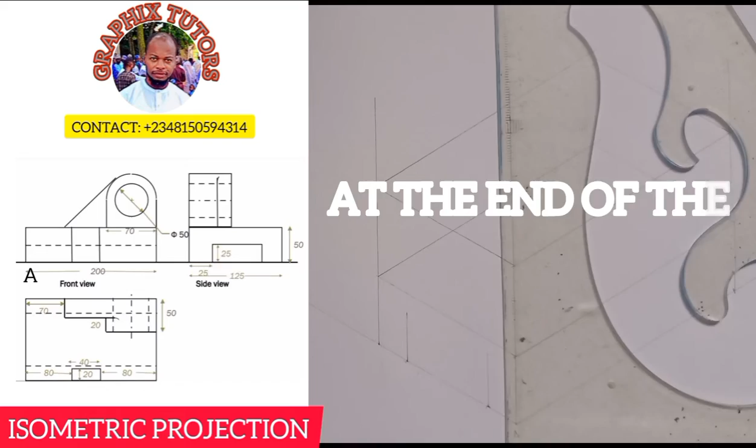If you look at the left hand side of the screen, you will see a question: the orthographic view of a given figure. This view is in first angle projection. This is the front elevation, this is the plan, and this is the end view. So we are to assemble them in isometric projection. But if you look at the dimensioning, it is very large, so I would like to reduce the dimension in a ratio of 1:2, that is half full size.

So I'll use half of every dimension I have. If I have 200, I'll be using 100. If I have 70, I'll be using 35. I'll go together, so let's start.

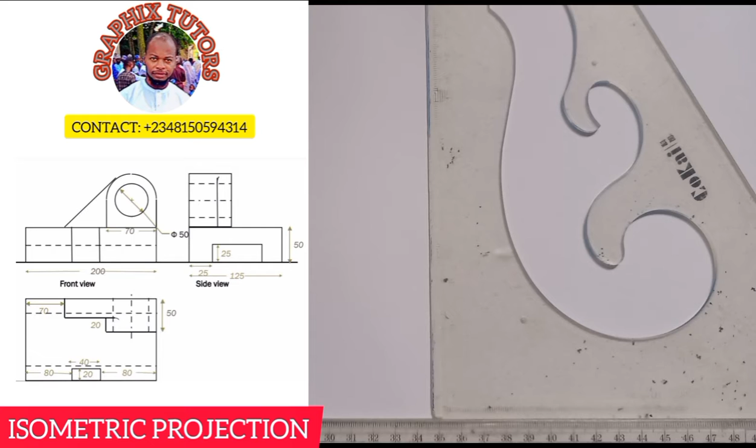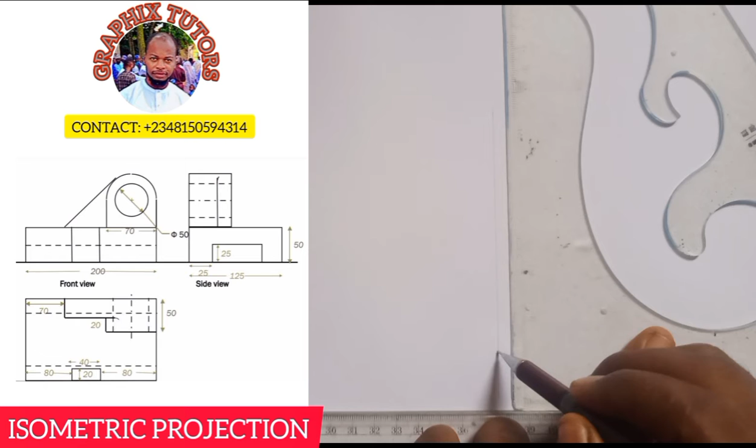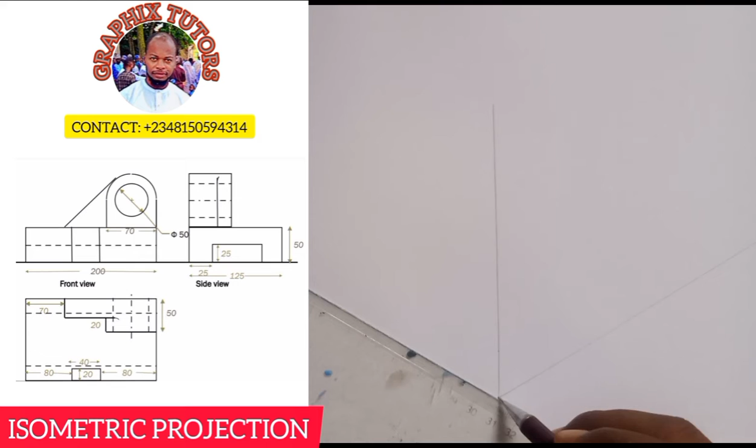Now when you hear the word isometric projection, the first thing you have to do is draw your isometric axis. You draw your vertical line this way, and make it more visible so we can have a clearer view of it. We'll have the vertical line this way, and we have the horizontal line also this way. And we also have the other line here too, can you see that?

The fact that the diagram is facing this direction, look at the elevation. So this part you see here, let's say it is point A, meaning that point A will be somewhere around here. So we're measuring in this manner.

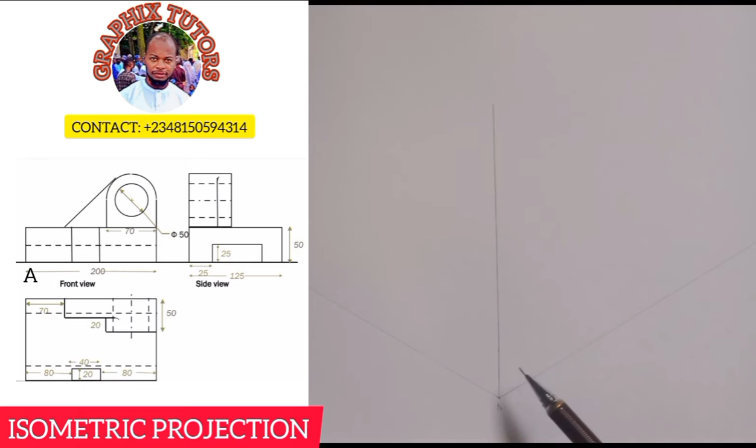So we see that from here I'll measure 200, but because I'm using half full size, I'll measure half of 200, which is 100. So let's measure that of 100 here and see. So if I place it here, so from 0, can you see that, 100. This is where it ends.

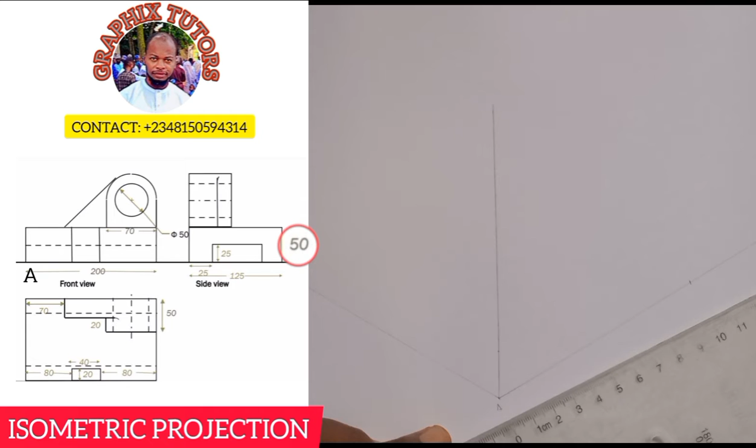While the other side, the height? Since from here to here, from the end view, is 50, and in the front elevation, nothing is given there. But look at the length of this circular figure here, this semicircular figure is 70. It means that the height also is 70. So 70 plus 50 will give us 120, so I'm going to measure half of 120, which is 60.

So I'm going to show 60 here. So from 0 to 60. That is half of 120.

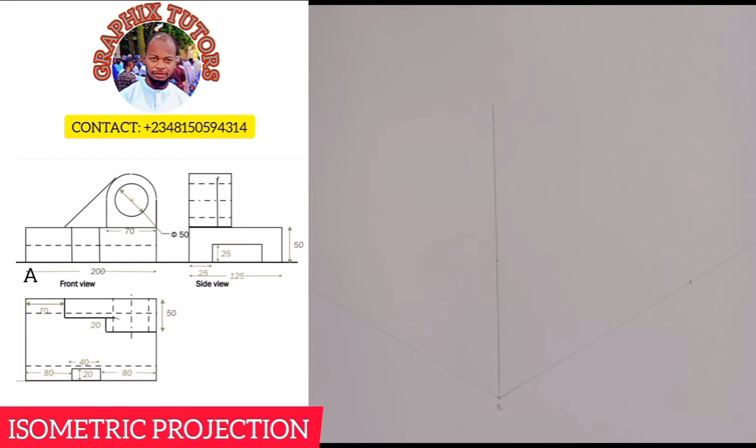And the width is given, not shown here, check from the plan, but check the length of the end elevation is the width, and that is 125. So half of 125 will give us 62.5 altogether. So I'm going to measure the width here to be 62.5. So from 0, 60, 62.5, somewhere around here.

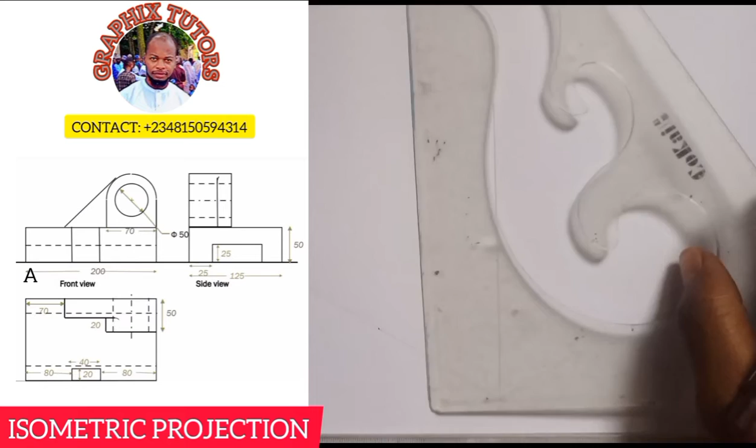And I'll now use it to form my figure this way. So from here, I'll take it up, and from here, I'll take it up, and I'll use it to form my box this way.

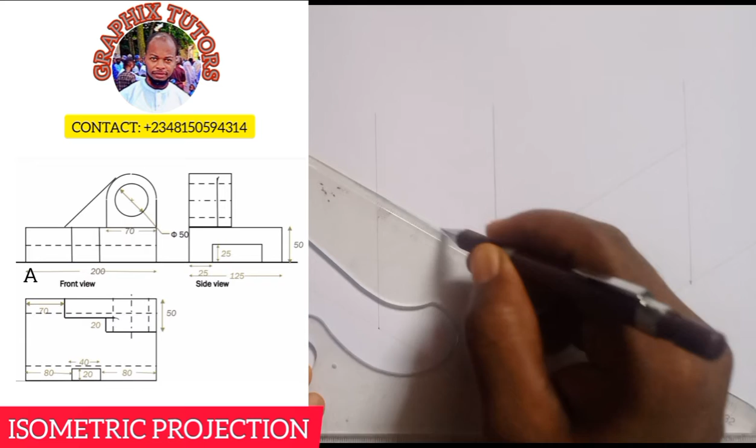Can you see that? So I brought out the shape, let me make it more visible.

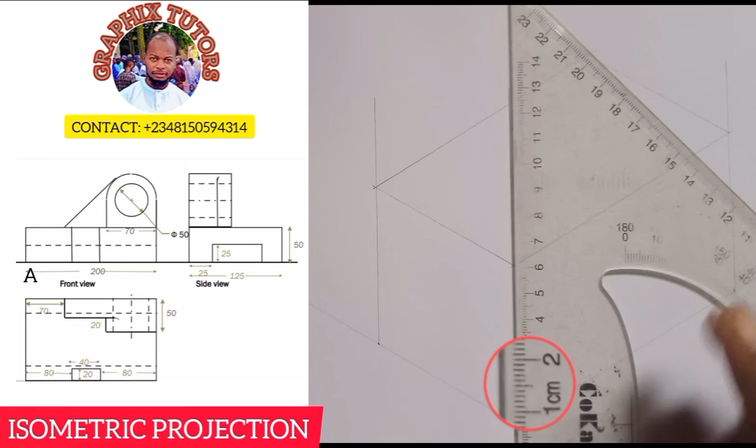So we'll proceed. Now from here, let's just measure our height of 50. First of all, we measure the height of 50, so you take half of it, which is 25. So from 0 to 25, because we're using half full size, right?

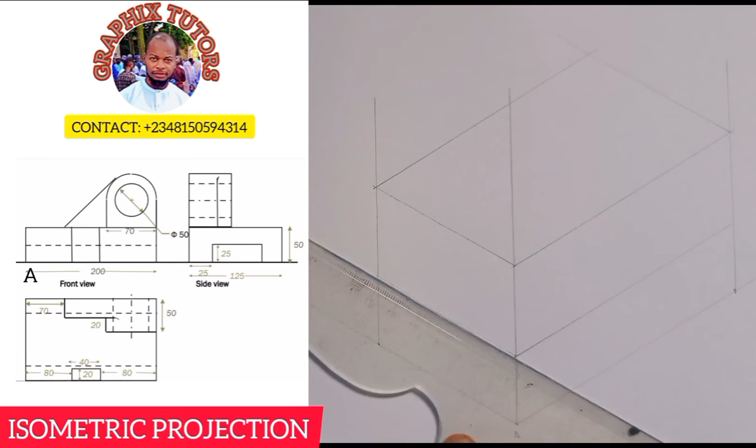Then I'm going to use it to go round and round it this way, this way, this way, and this. Hope you can see that.

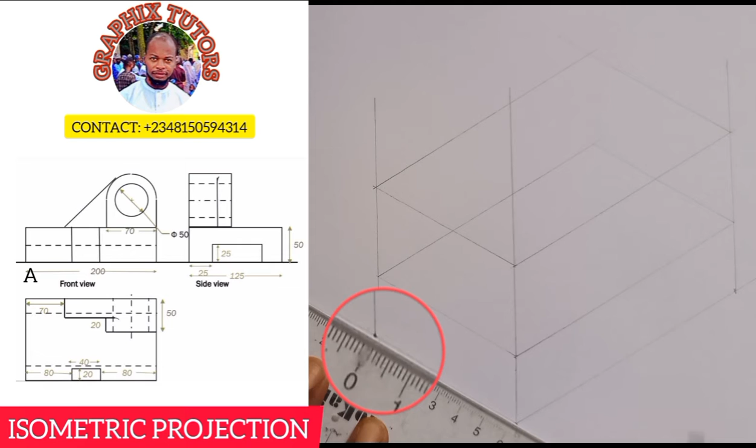That is the thickness. Then within, we have 25 here, so I'm going to measure 25 from here and from here to get that thickness there. So I'll measure 25, so from 0, half of 25 is 12.5. So 0, 10, this is 12.5 here.

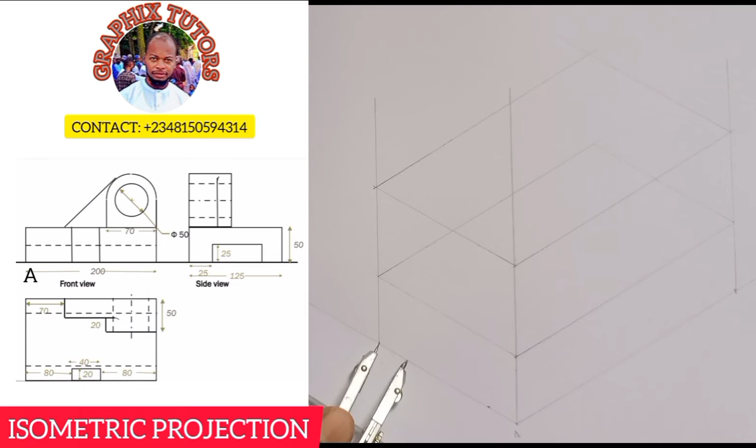I'll come here again, I'll do the same thing here: 10, 11, 12, 12.5 here. Hope you can see that, or you can just use your instrument to ensure uniformity. Hope you can see this and this too.

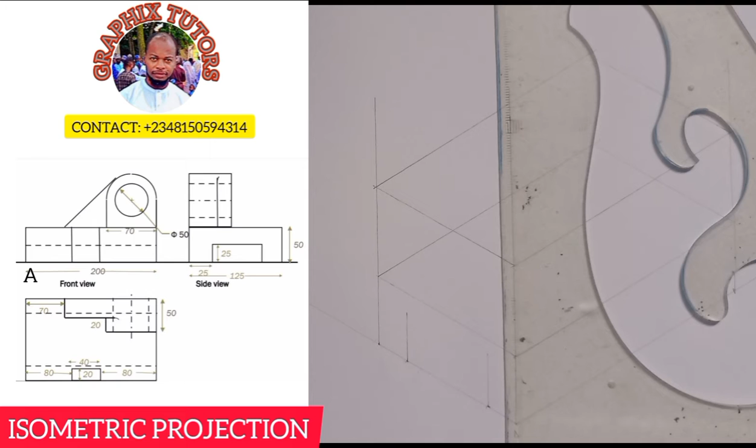And I'm going to take it up in this manner, and here too. And the height you see here is given to be also 25, the same thing. So whatever happened here, 12.5, we're using half full size, don't forget. I'll come here to measure 12.5 again, then I'm going to thicken it and close it up in this fashion.

Can you see that? I also thicken this side too, all this point to here.

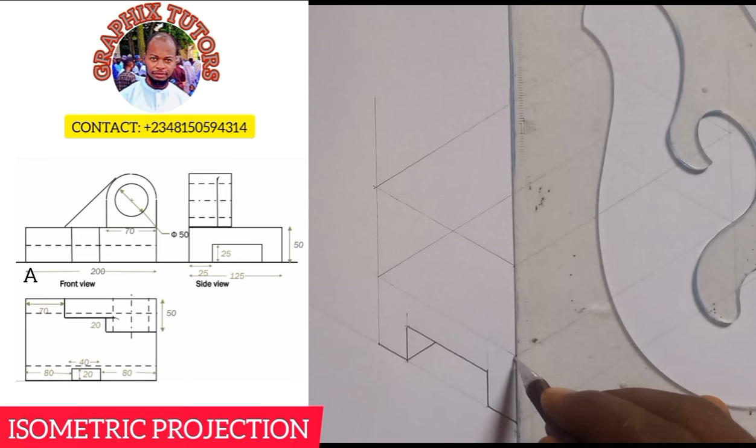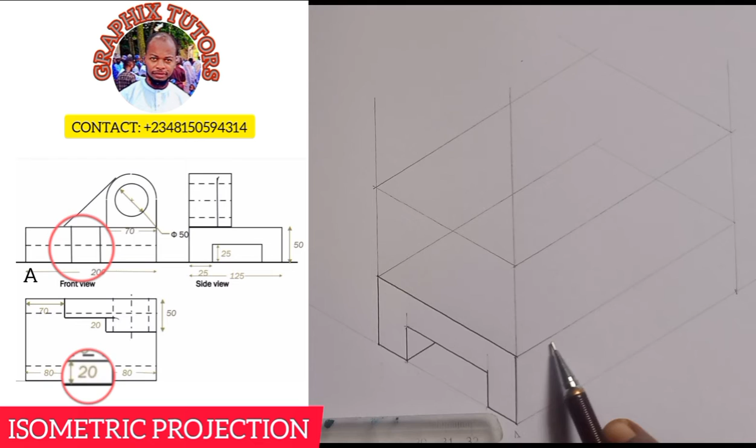Hope you can see that. To get to this point here, you're going to move a distance of 80. But because we're using half full size, we're using half of it, which is 40. So I'm going to measure 40 from this side, from 0 to 40.

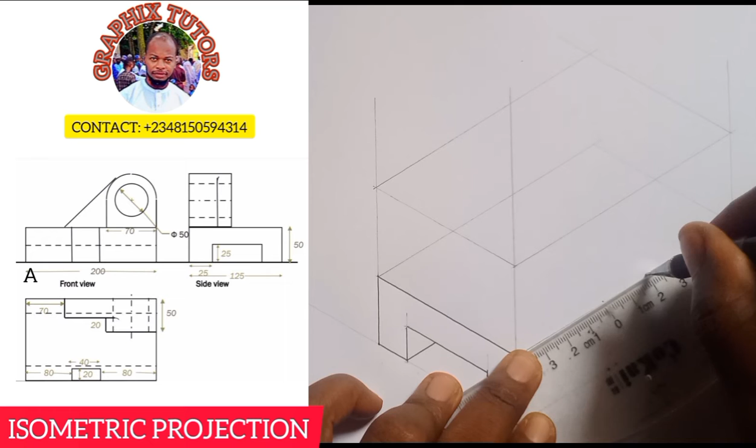Can you see that? Then measure 20 again, as in another 20. From 0 to 20.

The next thing is I'll bring it down in this fashion, and in this fashion too, so I can easily just thicken it out straight, just to save our time.

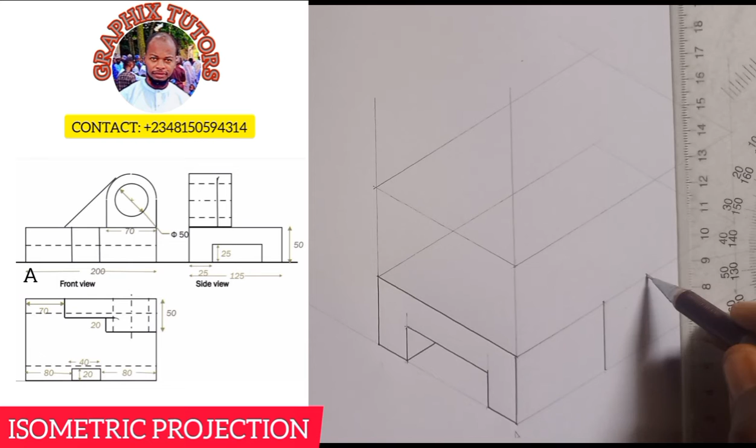Then I'll take it in by 10. Remember, half full size, so if it is 20, it will be 10. I'll take it in by 10. So let's measure the 10 out.

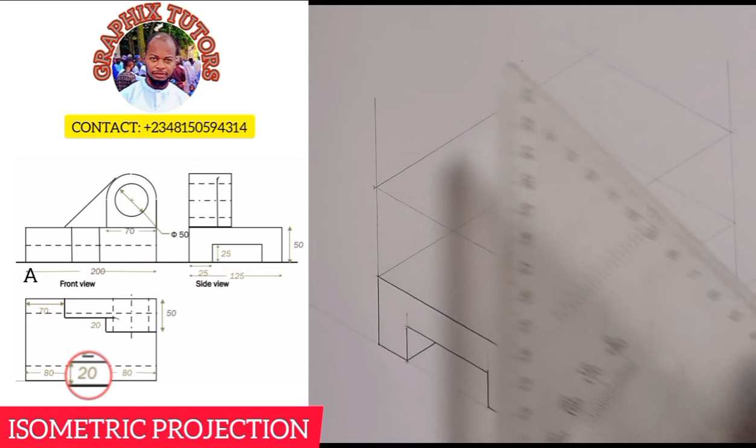From 0 to 10, so you can usually just take it out. Then close it up, and also close it up.

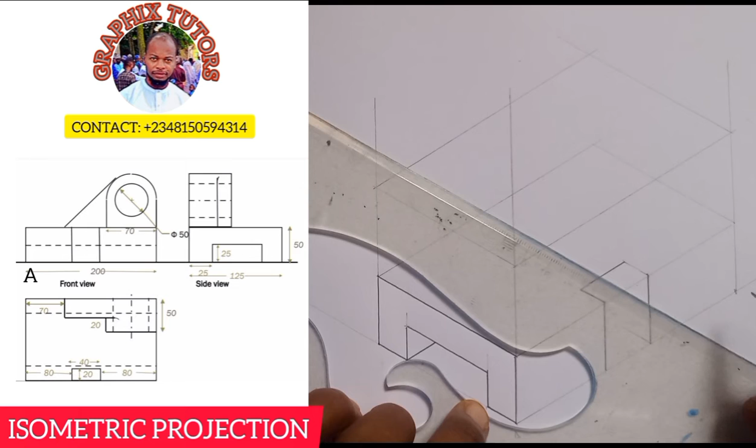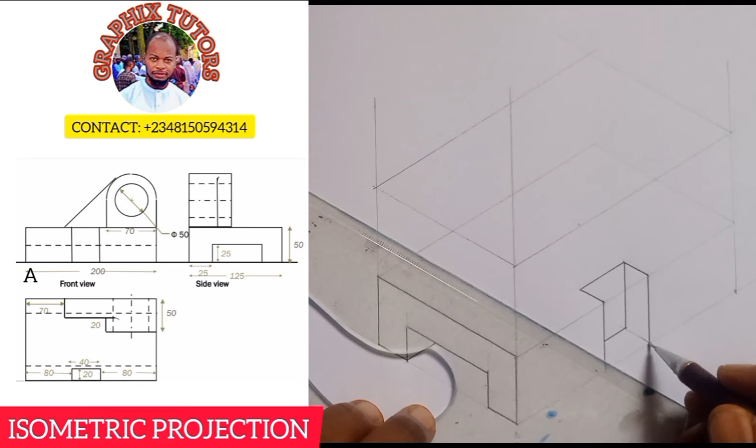Bring it down, then close it up, and here also this way. Then I can close the rest up here.

So this hidden line you're seeing, this two hidden line, looking from the top is this. So looking from the top, you cannot see these 2 points that you see this hidden line running through.

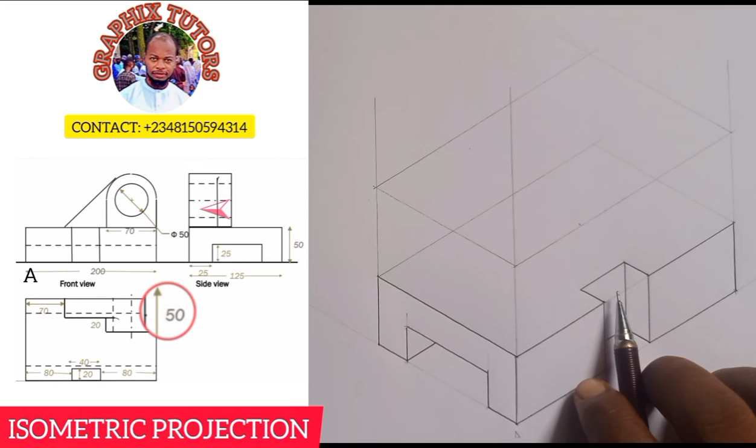Then the other one will measure 50 to get that circular figure there. So I'm going to measure 25. So measure 25 here, from 0 to 25. Here we have.

And I'll take it up this way. And I'll bring that guy out this way.

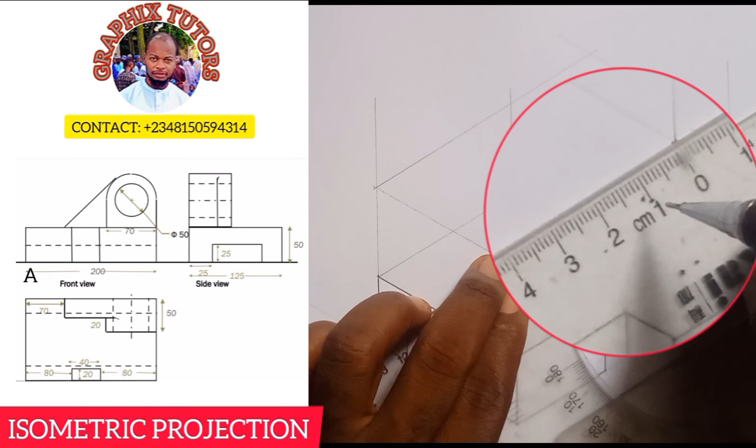Remember it's 70, so I'll measure 35. So from 0, this is 35 here.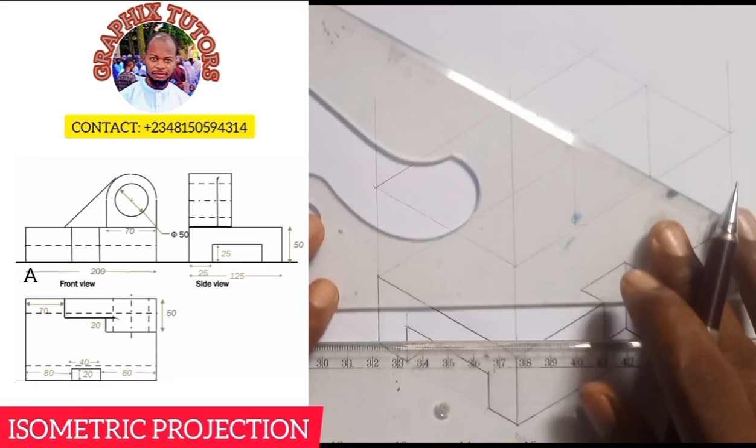So that way I'm going to draw. So I'll bring this out, and I'll take this up. And I'll close it up to this extent here, and here too.

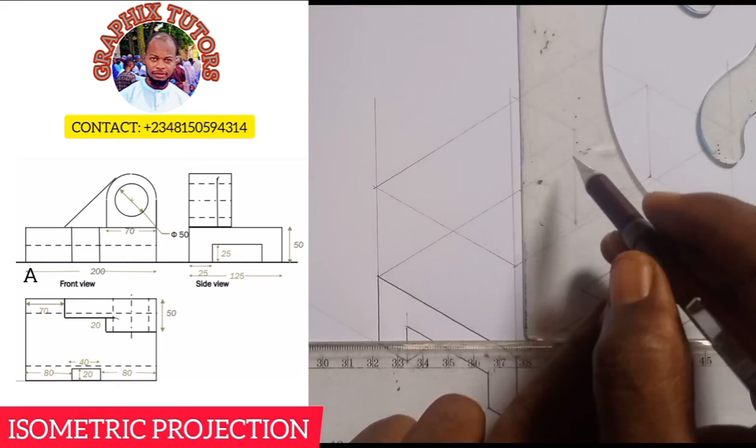Hope you can see that. Now I'm going to draw a circular figure here in 3 places. So this is the first part the circular figure will be, and this is the second part. Then the third part will be 20 millimeter away from this end here.

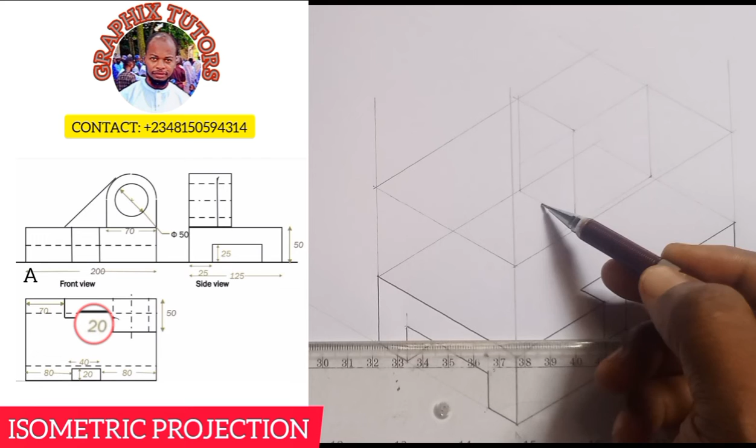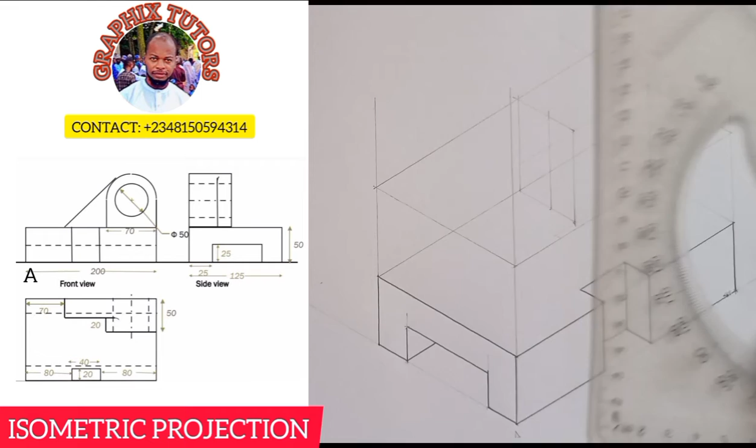So since it's 20, I'll be using 10 because we're using half full size. So I'll come here and measure 10, from 0 to 10. Then I'm going to take it up this way. And I'll close it up.

Hope you can see that. So I can now start drawing my circular figure here. So the first one is just coming in. So let's do that and see. You join the diagonals.

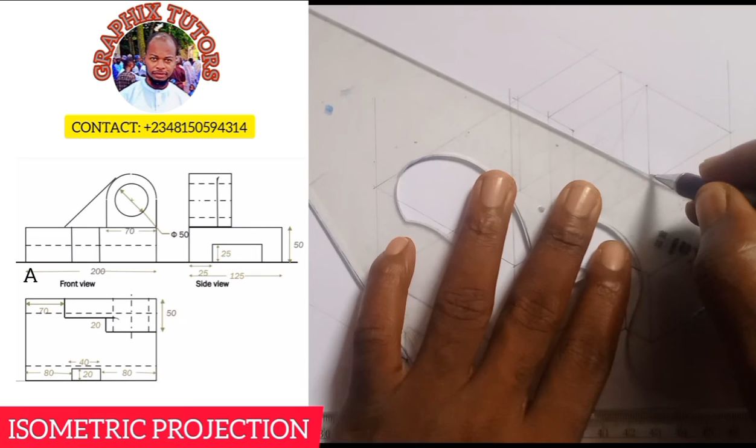So when you do that, they are meeting here. That will be the center of that figure. Then I'll bring this down, and I'll take this way.

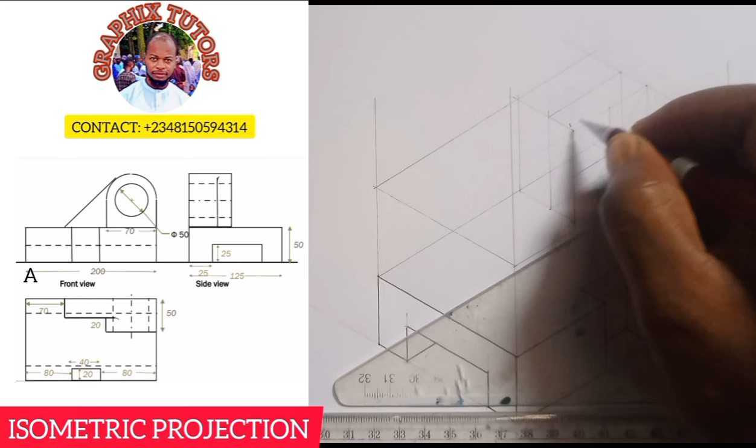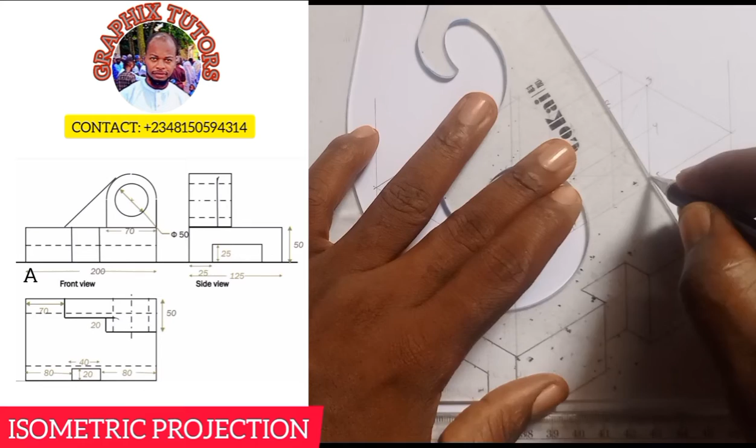So I can easily call here to be 1, 2, or 1, 2, 3, 4, 5, 6, 7, and 8. So I'll move from 5 to 8, and I'll move from 5 to 2. Can you see that? So they are meeting here, so which I'll call 9 and 10.

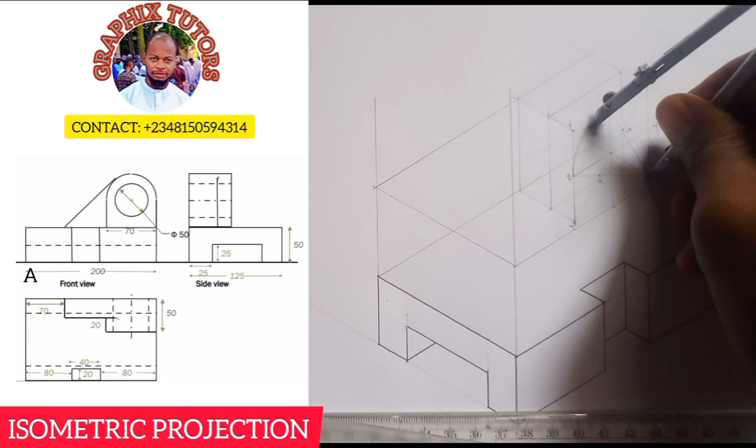Not necessarily draw this. Now, I'm going to connect from 5. Then I'll connect 8 and 2. Can you see that? Then I'll place it at 10 to connect 2 and 4.

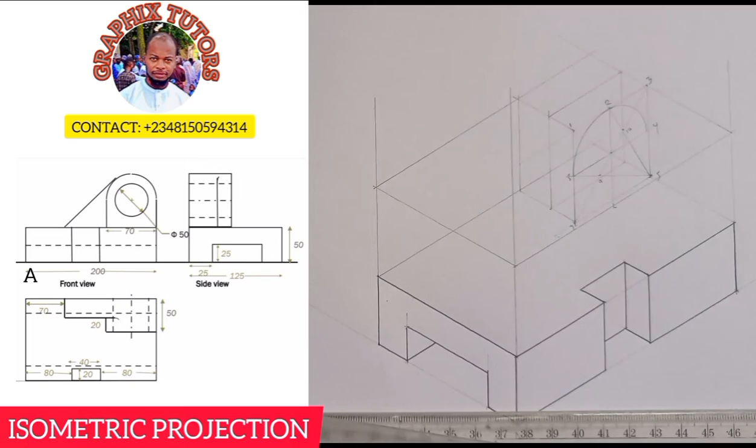Can you see that? Now the next thing I'll do is the same thing at every end here. I'll connect from this end to this end, then from this end to this end, then transfer the points.

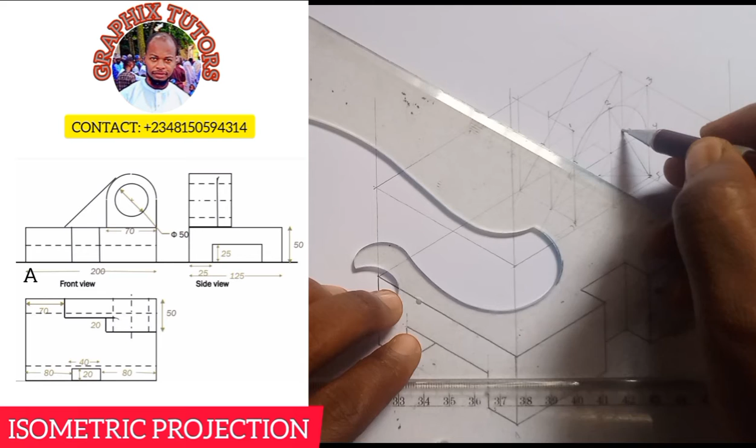If I transfer point 9, it will be at this line and also at this line. If I transfer point 10, it will be at this line and also at this line. Can you see that? Then I'm going to move these diagonals from here to touch this diagonal here.

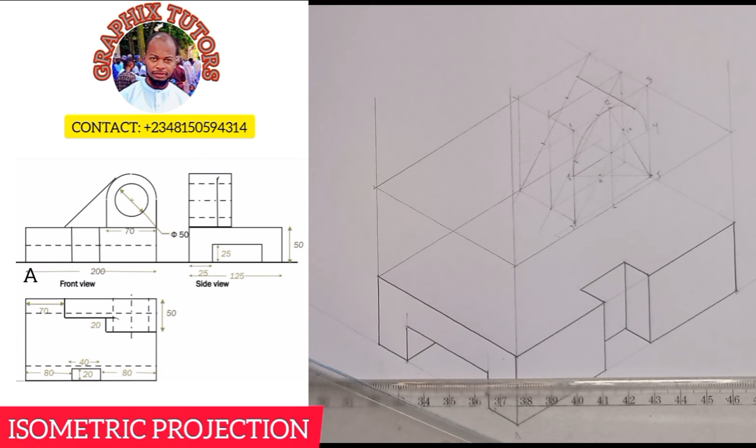Can you see that? Then I'm going to move this from here and connect this to this part here.

Then I'll place it at this end to connect this to this part here, using the front line first. Can you see that? I'll do the same thing here too, connecting from here to this point here.

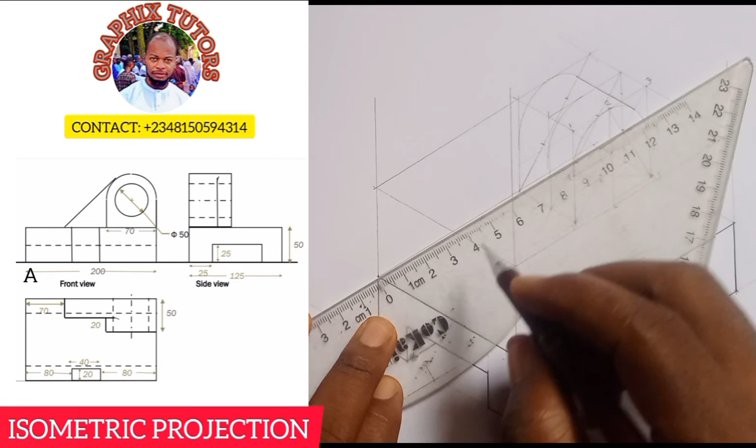So let's measure that 75 here. From 0 to 37.5. 0 to 37.5, somewhere around here.

Can you see that? So I will just bring this in this way, right? Then you join from this point. There will be tangential to this line here.

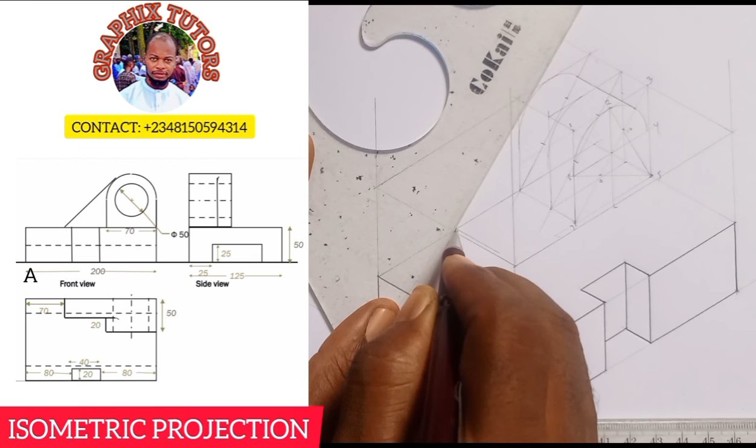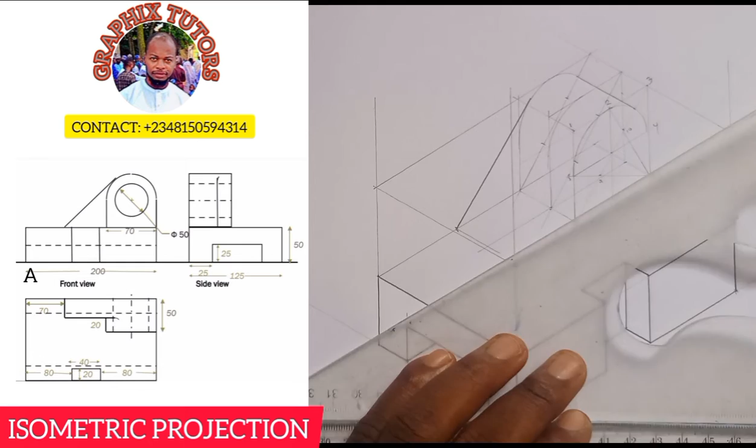Right? And you will measure, you just bring this one out. We have this, and we have the other one too here. Can you see that? And you're going to join this also, tangential to this point here.

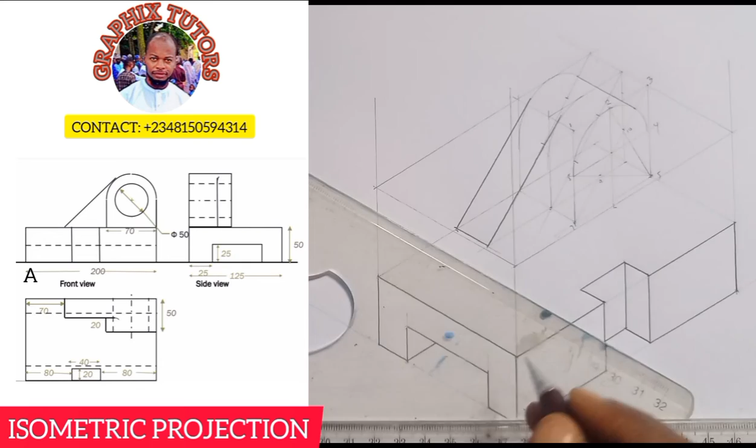Can you see that? And you close it up, right? And you bring it down this way. Can you see that? And you close it up this way.

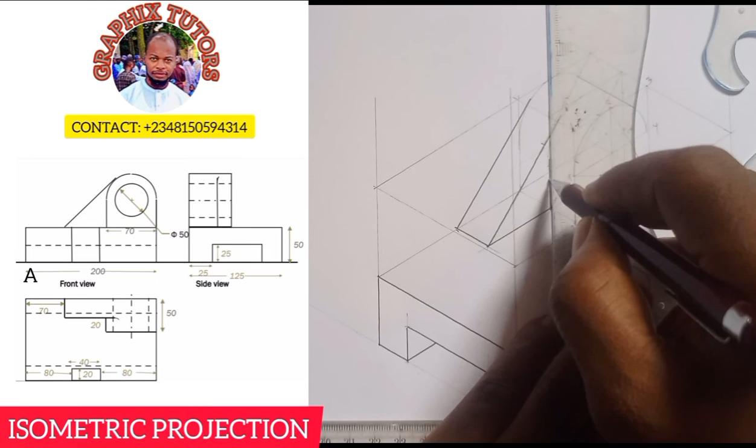Hope you can see that. Now I can easily take in everything that we have here. From this point, to get this, I'm pressing it at this point here to take this out.

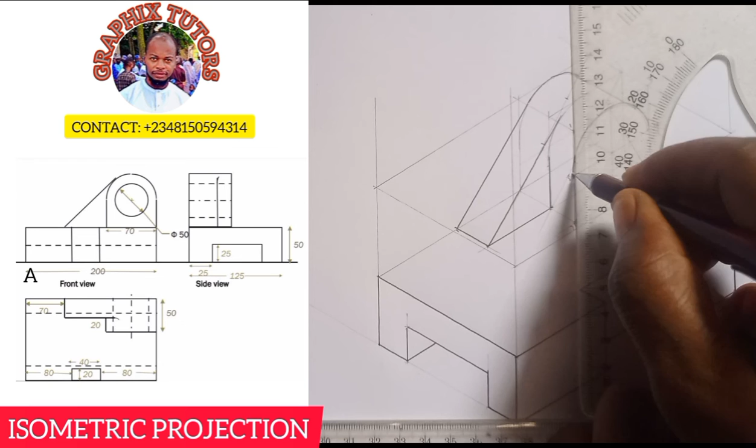Hope you can see that. And I'll take in all this side too in this manner. Then this will be coming down too, and here too, here too.

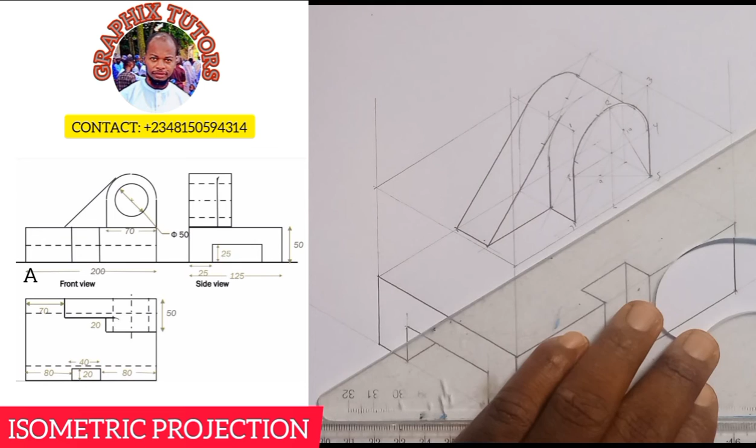Closing. I usually close here, and I usually close here. Similarly, you can close here, and also you can close here. Hope you can see that.

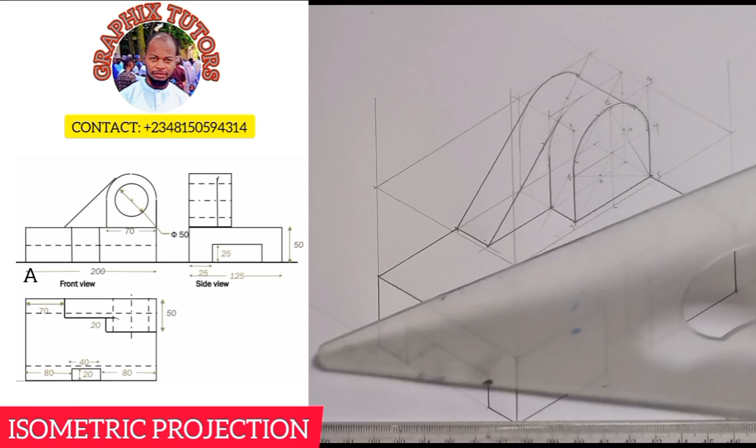Now, if you look at this closely, there's something here also, the circular figure, which is given as 50 millimeter. So I'll use 25, meaning I'll be using 12.5 in that direction.

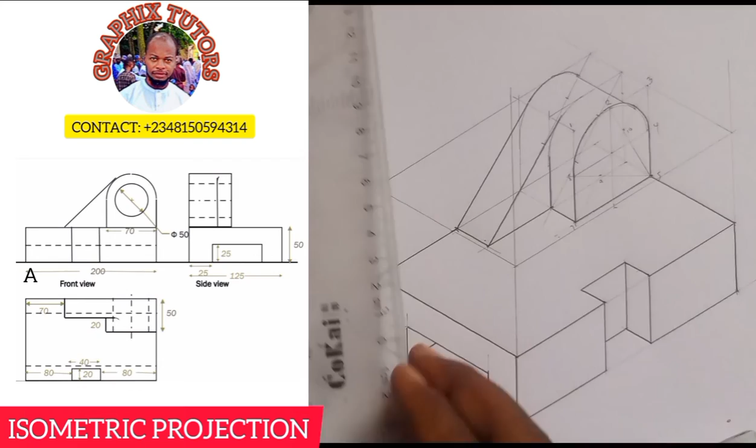So let's measure 12.5. If I take this from 0, it should be 10, 11, 12.5 around here. I'll place it at the center point. I'll mark 12.5, 12.5, 12.5, and 12.5. Then I'll use this point to form a square shape.

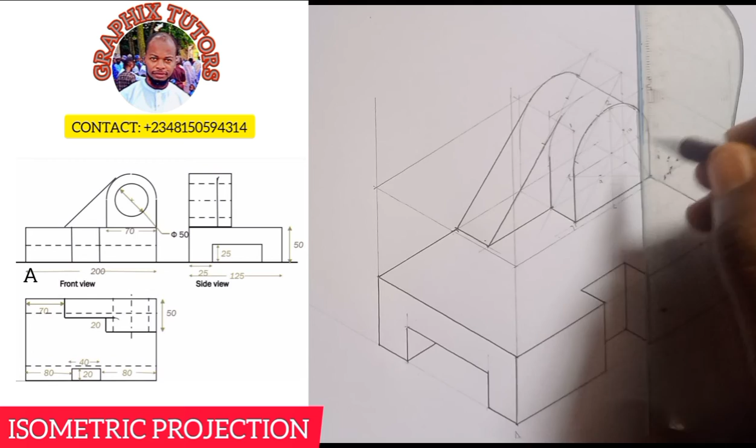This, this, this, and that. Can you see that?

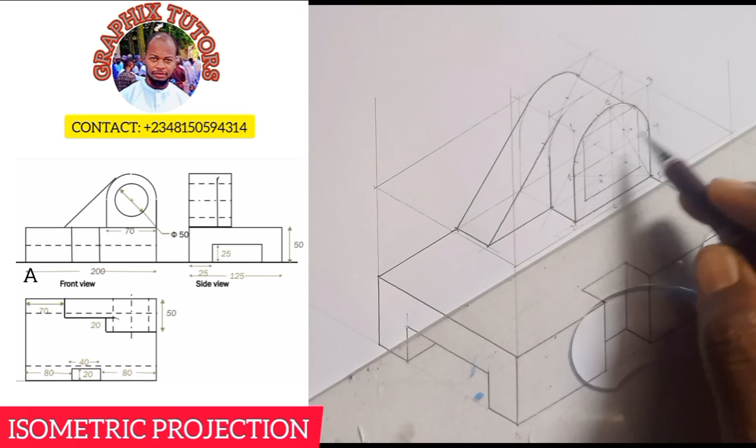So in here, I'll have my circular figure. You can just join from this part to touch here, and from this part to touch here. So this is here and here. Take your instrument from this point, take it down here and connect these two.

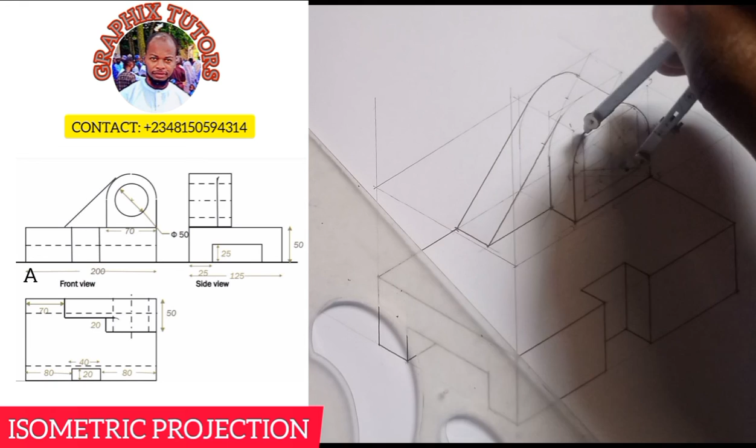Alright, you place it here also, connect this too. And you put it here also, connect here also. You come here too, connect here too.

Right, and now taking it out. Here's what we have. Can you see that? So what else are we adding to this?

So if you're looking at it from the top, from the side, you see the circular figure, which is the circular figure Φ50. You see this semicircle, and you see this line coming here. So this will be blocking this, right?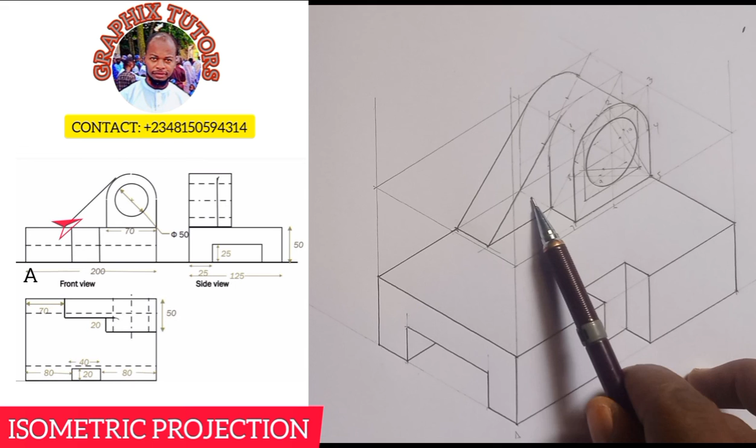So this part you see here, that is this part my arrow is pointing. Then this figure you see, you'll be seeing here as if it's on this point here. That's why you're seeing it the way you're seeing it, at this point. So the plan is telling us that it's going in. And this is what we have here.

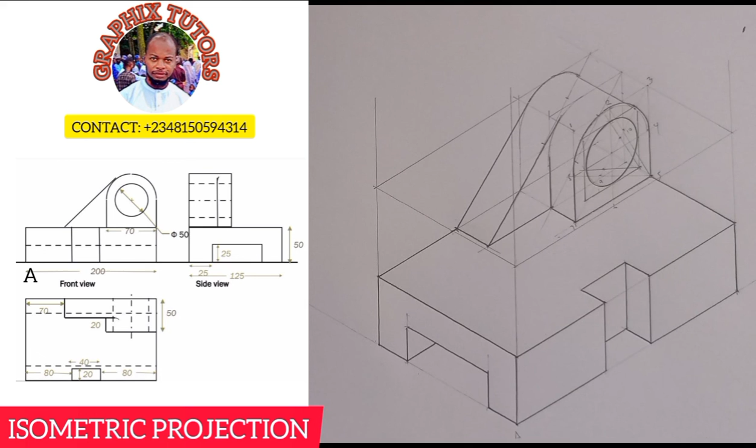You transform this figure here into isometric projection. So it's better for you to also do your dimensioning.